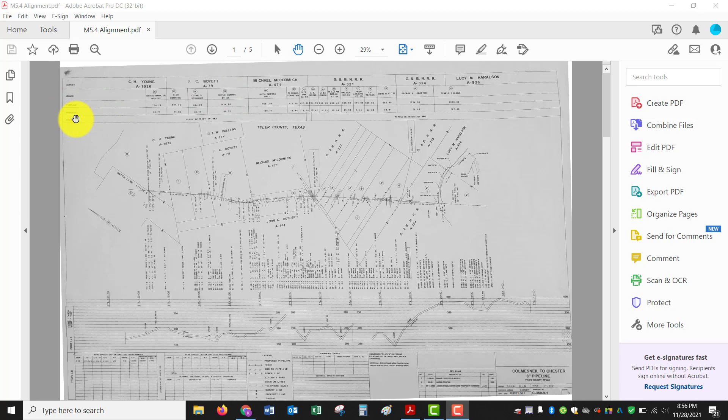In this section here, we have the profile elevation for the pipe and the grade as well. And then in here, we actually have the alignment. And above the alignment, we have some information here as to the survey, who conducted the survey for each one of these sections, the owner of each one of the properties, footage, we have roddage, and then the terrain information as well. So I'm going to start with the title block. Let's zoom in just a little bit.

The title is Colmesneil to Chester, and this is an alignment for an 8-inch diameter pipeline. It is in Tyler County, Texas. It tells us the scale is 1 inch equals 500 feet. Drawing number, sheet number, for example, this one is 2 of 5. The first one was 1 of 5, etc.

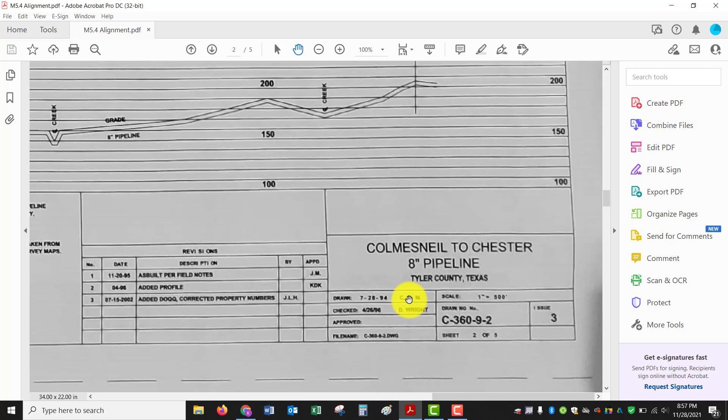In here it tells us who checked the drawing, who drew it. Any revisions that have been made on the sheet itself are listed over here, and of course you'll have numbers 1, 2, and 3 for each one of those revisions. In here it just lets us know that we assume that the pipeline is 4 feet below grade, and then it also tells us that the depth is 5 feet on creeks, highways, and railroad crossings. And note, all elevations were taken from United States Geological Survey maps.

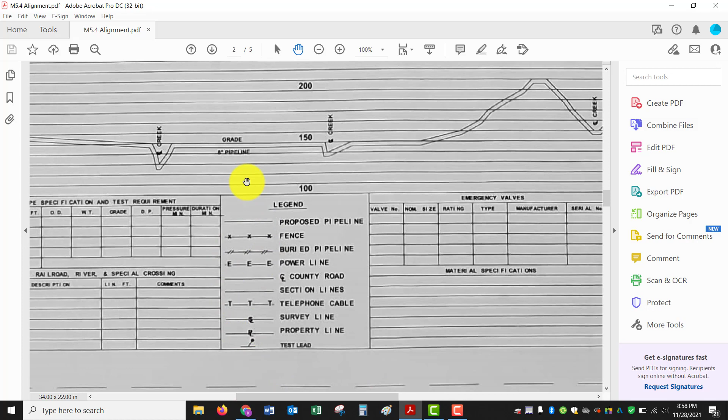Any emergency valves here, there's none. And here we have the legends to let us know what each one of the different lines represent. Any other pipe specifications, we are not given any. And then any pipe specifications and test requirements are listed here. Okay, so that's for the title block.

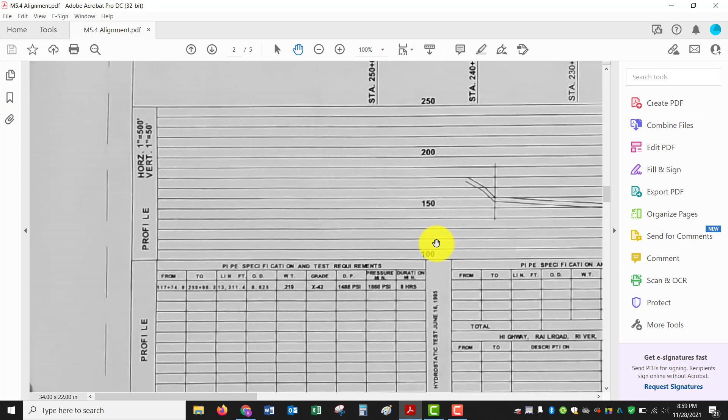Okay, so the second part is the profile. It tells us that horizontally 1 inch equals 500 feet and vertically 1 inch equals 50 feet. So from here to there is 50 feet, so that would actually be 1 inch. 1, 2, 3, 4, 5 to get to this line, which would actually measure 1 inch in the drawing itself. So this is 100 feet above sea level. Then of course each one of these lines represents an increment of 10 feet.

You may notice that some profiles, let me show you the first one, I think does it. Here, some of these profiles will shift up and down depending on the elevation. So obviously this pipe went down deeper than the 250 feet that was listed here at this line, and so that just means that from this line forward they have shifted this profile up. So in reality this line here would match this line. It's letting us know that the pipeline went below here, but because we didn't have enough room, they just shifted it up a little bit.

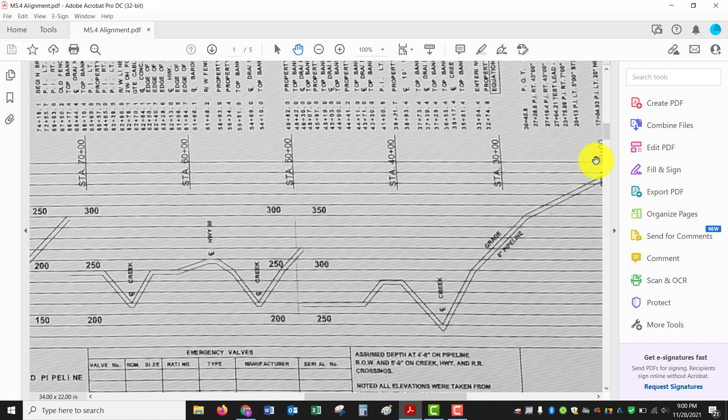Notice also that there's another shift here. This is on sheet 1. I was showing you sheet 2 earlier. So let me shift back to sheet 2. If we look a little closer to the line itself, you will notice that the bottom line represents the pipeline, and then the upper line here represents the grade. That's the actual grade of the land itself.

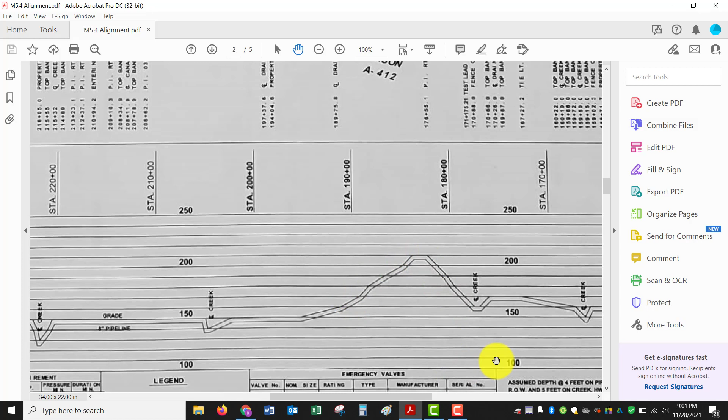In some points that are going down, there's several creeks. There's a creek here, another creek here, and another creek here, and then this is an elevation, just showing that there's a hill or something to that effect. Also, we have these stations right here. Then we have the alignment itself, which is over here. This is the line here.

Notice that the line has 2 little dashes. So if I go to here, it tells us that the line with the slashes is a buried pipeline. And then just a straight line is the proposed pipeline. So if I look at the alignment here, this is the existing pipeline with the two slashes every so often, and then the bottom one is the proposed one. In here it tells us that the existing Houston pipeline is 12 inches in diameter. And of course, we know that the one that is proposed is 8.

Notice these markings here. Every time the pipe changes direction, in other words, has a different angle, you will see that you have these little dots. Let me zoom in just a little bit. These little dots just mean that the pipeline is not straight anymore. It just bent a little bit. And each one of these tells us the angle that it broke in.

For example, this one is southwest. So this one came from this point. So from this point, it went southwest 81 degrees, 38 minutes, and 50 seconds west. So southwest. Then from here to there, there's another one here. From there to there.

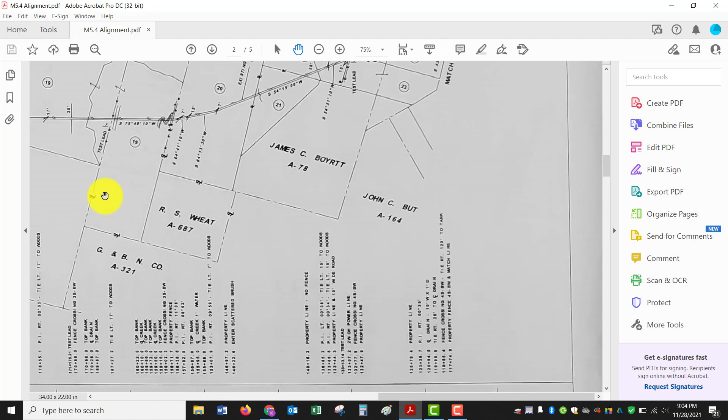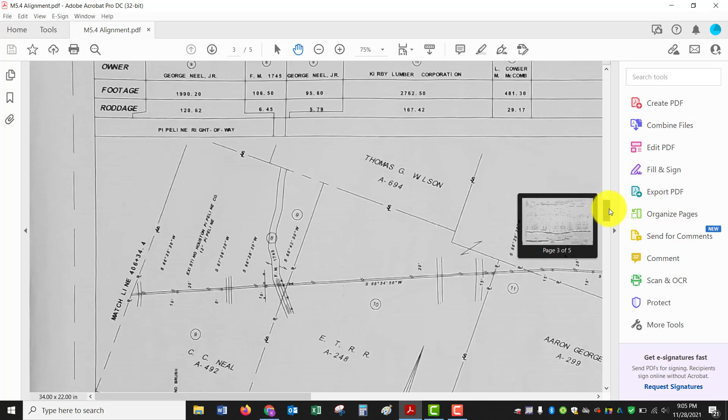If you zoom out just a little bit, you will see that we have a north arrow pointing this way. Okay, so that lets us know the orientation of the pipeline. And then you will see also that we have a match line. This match line tells us that it's matched 250 plus 86.3. So if we shift to drawing number 3, you will notice that the match line here has the same angle and the same information there.

So what that means is if we line up these two drawings, and this line right here is matched with the one previously, even if we have to change the angle of the sheet to match it completely, it would give us the continuation of the line itself. Okay, so this one, match line 117 plus 74.9, that would be matched with sheet number 1, and it's right here.

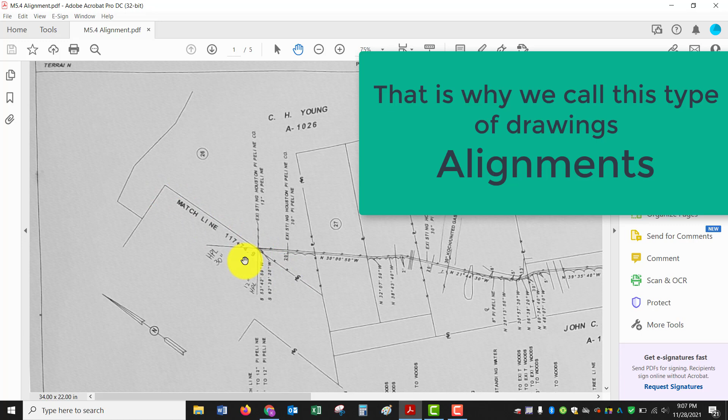Notice that the angle is different and that the north arrow is pointing towards a different direction. So if I was to line these two up, I would have to shift the angle so that the north arrow is pointing in the same direction for both sheets, and I would butt the other line right next to this one, and that would show the continuation of the pipeline. Okay, I was on sheet 2. So I'm back to sheet 2.

Okay, and it tells us that there's a property fence there, there's top of bank, then the creek itself, another top of bank, and then it's just a matter of looking at this at the same time that we're looking at the pipeline so that we can get a better picture of what that is.

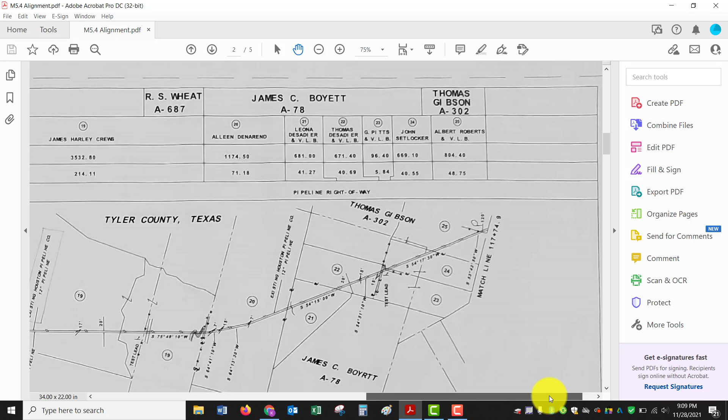Now, the top section of each one of our sheets gives us information about the survey, who conducted the survey, who the owners for the properties are, footage for that, roddage, and then the terrain itself. Okay, so let's say we have number 16. Notice this section right there.

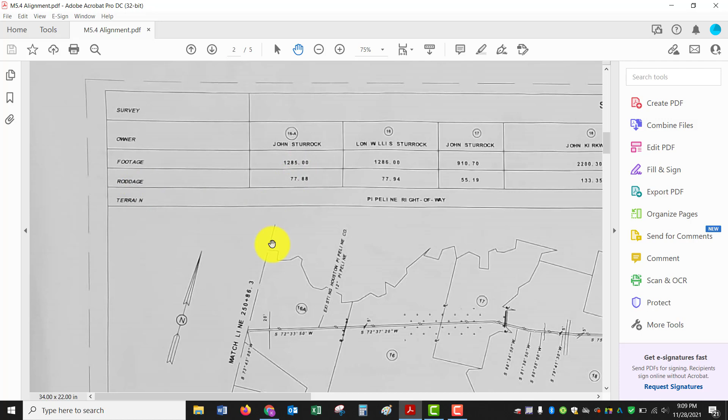Okay, that is 16A. The owner is John Sturrock, and the footage for that is 1,285 feet. And then the roddage, which is like the perimeter, is 77.88. For 16 and 17, it looks like it's all family owned. Then we have number 18 tract, which is this one here, and that one is owned by John Kirkwood, and it gives us the area for it and the roddage and so on there.

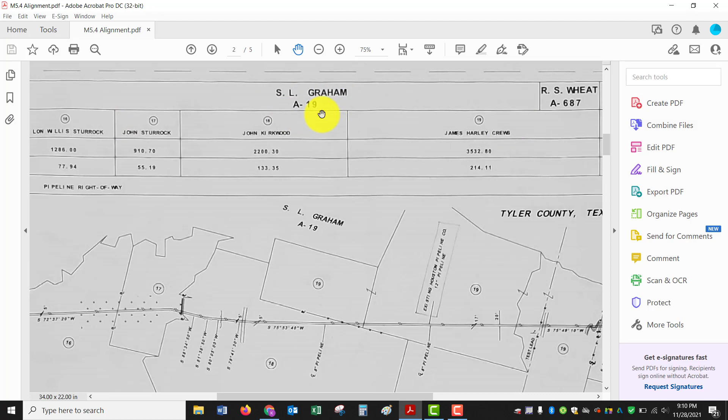The surveyor for that property here is S.L. Graham, and then it says A19 for how it is recorded in the books. So whenever you answer the questions, just make sure that you look at each one of these carefully, study what the pipeline goes through, and also what is labeled on each one of the markings that you have here according to what information is given to you here, and also in the elevation itself.